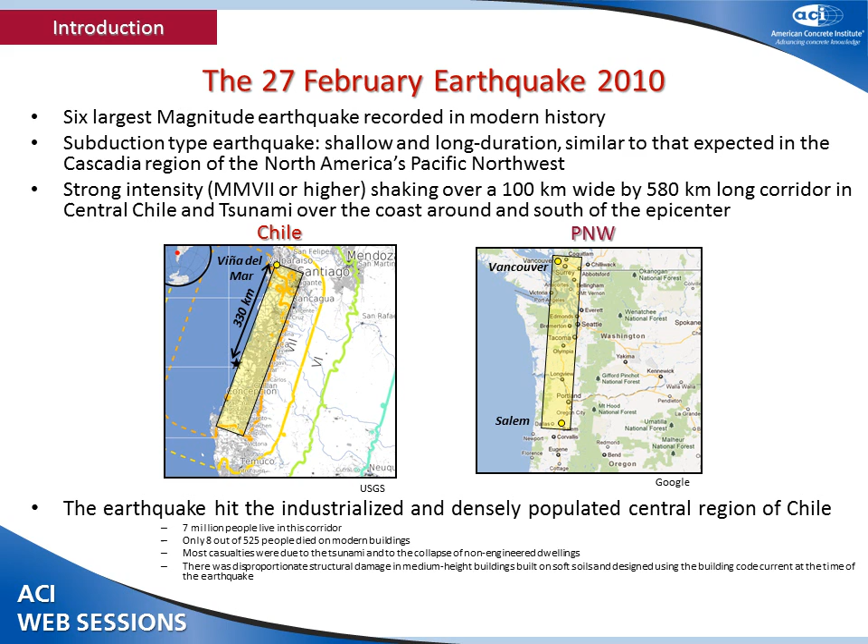Having said so, we must note that there was disproportionate structural damage in buildings that are relatively new in Chile, and that's a little bit of concern because there was extensive buckling of the reinforcing bars and crushing of the concrete in many of the walls. So in the end, we had a very large earthquake. People are okay, but is there something we could do, for a little cost, to enhance the performance of these buildings? That's something that is up for grabs.

So if we go back, this is a view of Viña del Mar. It's a beautiful city by the Pacific Ocean. And you see it's forested in medium-rise buildings. And these buildings in Chile follow more or less a typical archetype. You have a large density of thin walls everywhere. So partitions, the way we do them in the United States, are practically non-existent or limited.

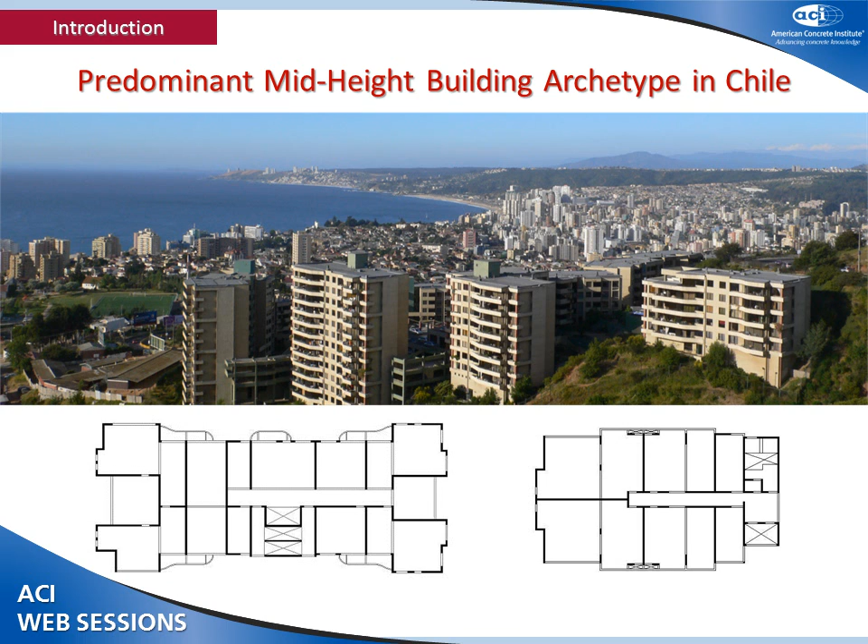In residential buildings, we see reinforced concrete walls or bearing walls everywhere in the building. And these buildings are regular in height all the way from the top to the bottom, except at the critical level where we can see a lot of transitions and openings in the walls to give access to the parking areas.

So typically we'll see slabs that are between 150 to 200 millimeters thick. They are solid slabs. The bearing walls have significant perforations, and they tend to be more critical near the first level where you have the accesses. So it's very difficult there to follow the load paths that you have all the way from the building. How are they going to be transferred all the way to the foundation?

So it makes it difficult to assess, difficult to capacity design these walls and really to postulate a mechanism of inelastic deformation. It could be possible, but it requires that we change a little bit the way we do these buildings. These buildings typically have one or two underground floors for parking. They are generally founded on mat foundations. Sometimes we have deep foundations, but they are very seldom used. So it's not common to use deep foundations in these soft soils in Chile.

And next to these very large walls, we have a series of small gravity columns that can be very easily coupled by the walls and taken in tension and compression, something we fail to see in any of the analytical methods. When we are designing with elastic analysis, we cannot perceive that these columns are going to be coupled and they will be subjected to extensive tension and compression, for which these walls are seldom detailed for.

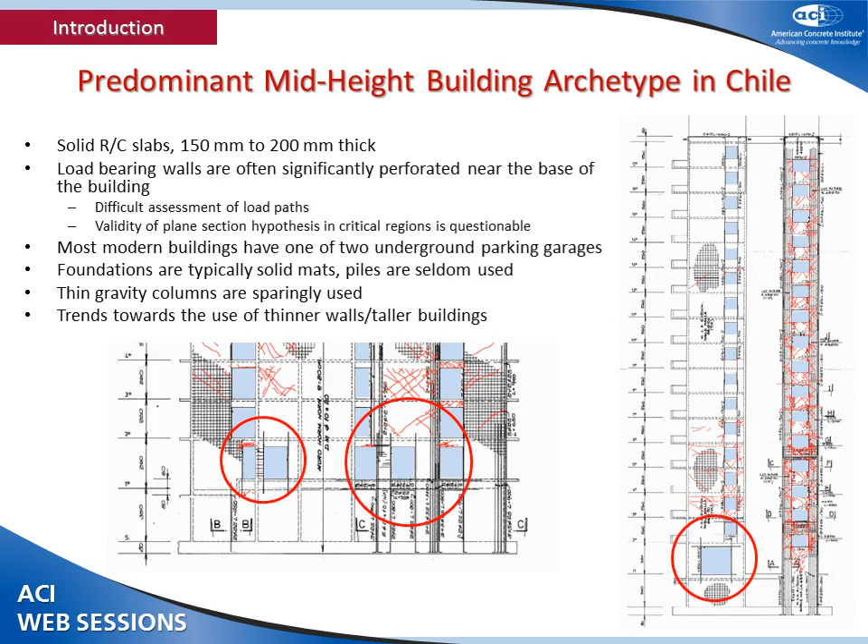So let me give you a little bit of background into what has been done in Chile. The codes in Chile have changed over the years, but basically the detailing remains pretty much the same. For these medium-rise buildings, the base shear ranges between 12, 15 percent or something of that order of the building weight. The walls are not necessarily detailed for ductility. There was the feeling in Chile over the years that the earthquakes they have are high frequency, and the displacement demands are not there to push these buildings beyond the elastic limit.

So somewhat the detailing of the reinforcement in many parts of these walls has been relaxed, and we can see a lot of lack of confinement, which was not required by the code, as is required here by ACI or all the codes in the world. And you see walls that have significant reinforcement at the ends with very little or no confinement at all. The transverse reinforcement for shear used to be anchored at 90 degrees. Obviously, once you have spalling of the concrete cover, you expose this reinforcement, you lose the anchor and the bars buckle. So we saw quite a bit of buckling, which I will show you, and even fracturing of the bars.

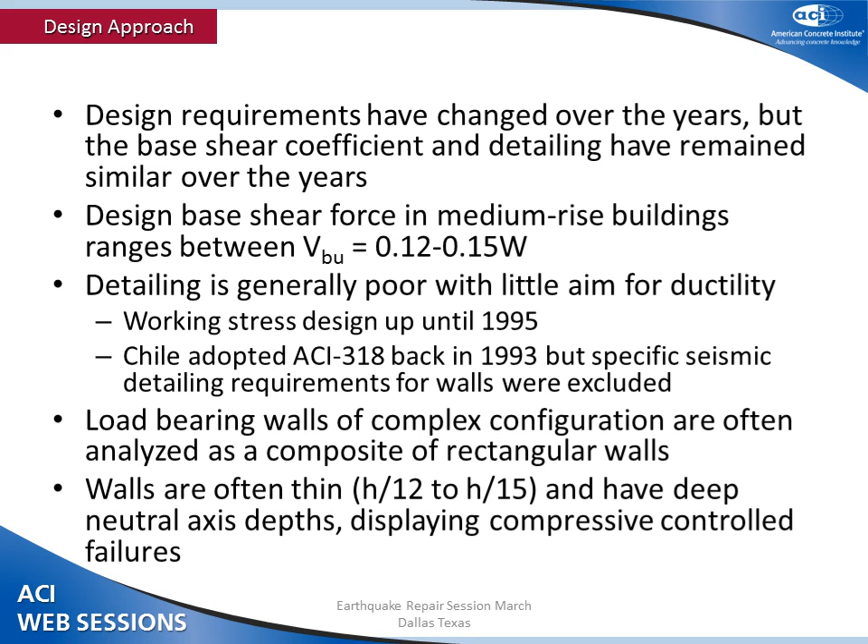In Chile, the ACI code was adopted back in 1993, and it's still current today with some changes. The walls are typically thin, a ratio between 1/12 to 1/15 of the clear height of the floor. Typically they range about 200 millimeters, 8 inches, give or take. So let's now focus on Viña del Mar.

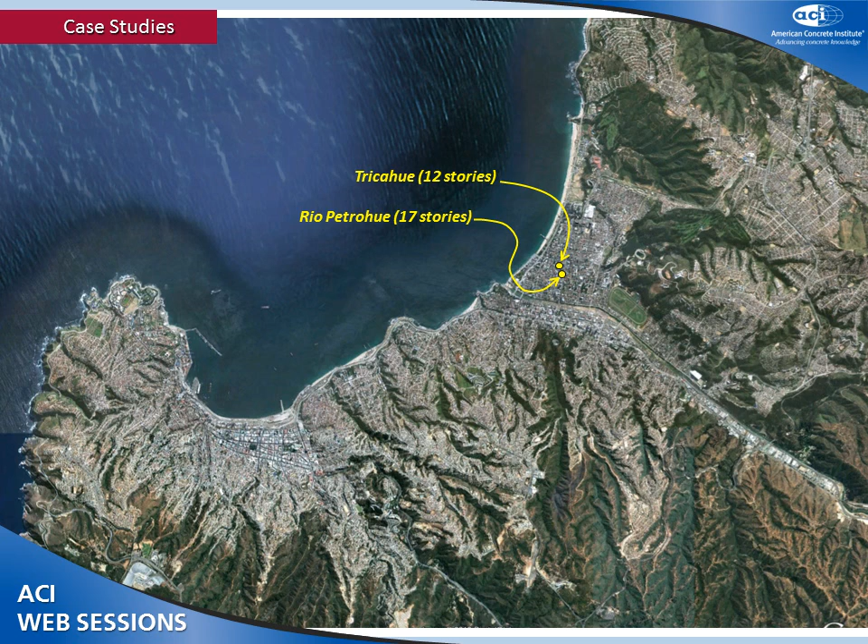So let me give you a close-up of the two buildings. This is the Tricahue building and the Rio Petrohue. And you see a number of buildings. Some of them are damaged and some of them are okay. These two buildings are sitting on soft soils, typically equivalent to what we would call here in the United States ASCE soil type D, low shear wave velocities, soft sands. They are founded on mat foundations. They are not sitting on piles or anything like that.

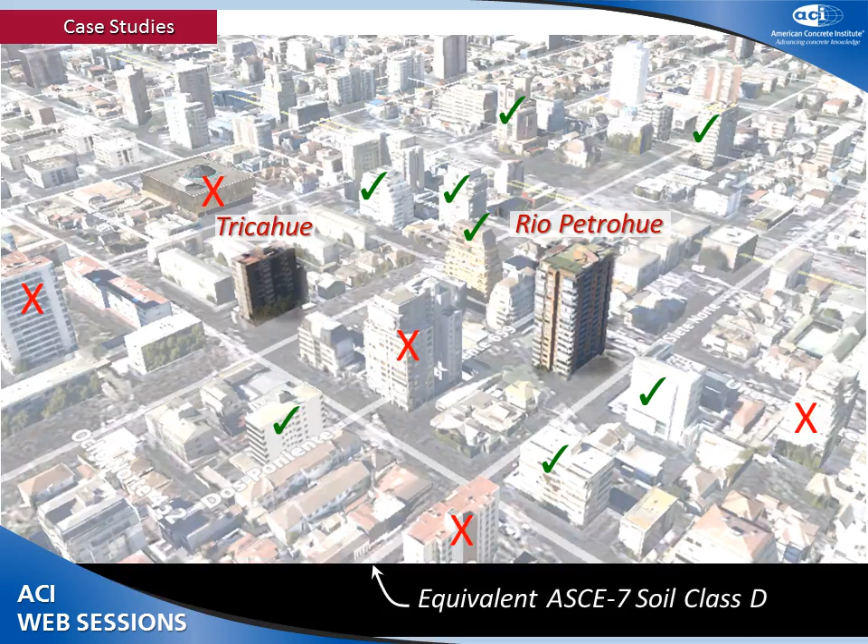The prognosis of the damage observed in these buildings was extensive crushing of the concrete at the lower levels of the building, endemic buckling and even fracture of the reinforcing steel, which was quite common in many buildings, not only in Viña del Mar, but also in Santiago and Concepción, different parts of the country.

So as a repair scheme, the main thing is how do you deal with the problem? Can you close some of these wall openings that are creating a lot of difficulties in the load path? Yes, you can. So you go for it, you close these wall openings. Increase the wall thickness. Some of these walls were really thin. Can you increase the wall thickness? If you're allowed to, you go for it. You increase those wall thicknesses.

Can you add some walls? I mean, in some cases it is possible to add some walls, and that's one of the methods that was used in Rio Petrohue, where walls were added to add additional strength to the building. And obviously then the small pieces here of epoxy injecting the small crack widths that develop in the slabs all throughout the height of the building. In some other applications, there has been the use of carbon fiber strips applied to the walls to enhance the shear strength.

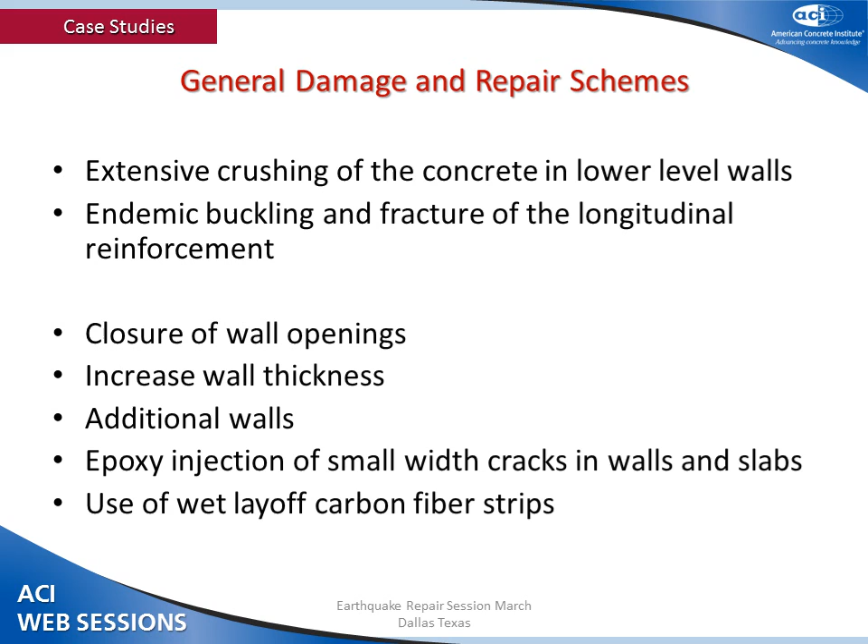So Rio Petrohue is a 17-story building with a total repair cost which does not include the repair cost of each apartment. It is all the structural repair cost of the building, the structural part, as well as the repair of the facade and the interior, the common areas of the building. So each cost associated with the repair of the apartment itself is not included. The repair cost of the building nears about $1 million, which is about 1/3 of the total replacement cost.

So associated with this, you are spending a lot of money repairing things that are not structural but have to be repaired because the structure failed. And the total repair cost to replacement cost is about 1/3. In Chile, it was quite common that if the repair cost is nearing about 40% of the replacement cost, a decision is taken not to repair, and then it's a legal process of bringing all the owners together to try to sell or form a cooperative for the building, demolish the building and build a new one.

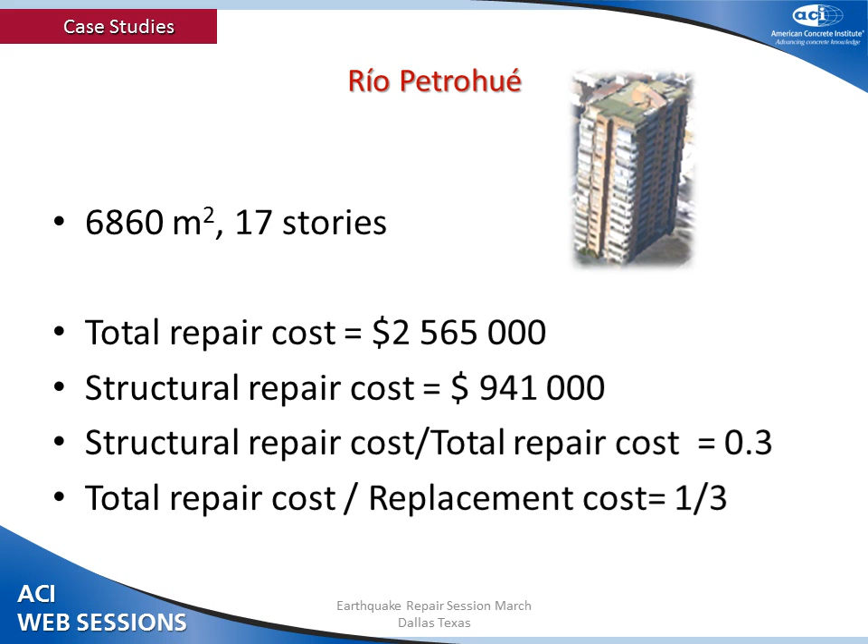So that's a very complicated part of the story, the legal process that goes with a building that is owned by many people, some of whom may or may not have their own personal insurance, but something has to happen to this building. There are about 3 or 4 buildings in Viña del Mar that are being demolished. Some of them are still in the process of deciding what to do. This is 2 years after the earthquake.

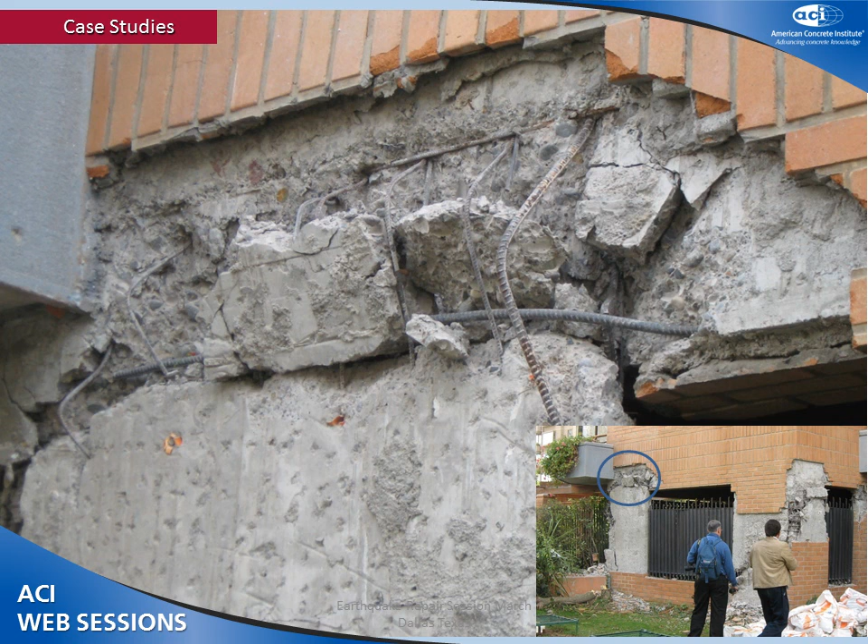This is the kind of damage you see. Exposed here, you see the crushing of the walls in several areas. In this case, the building in this particular location has come down on the order of 1.5 inches. So you see the development of yield lines in these buildings in Chile, quite common. You can see the bars have buckled now that the concrete is crushed, and this is basically suggesting that the building has come down quite a bit. Extensive buckling and also fracture of the reinforcing steel.

Very poor construction, as Des showed you a minute ago. It's also evident in Chile, the lack of inspection; sometimes we do some kind of sophisticated analysis and the level of construction and inspection is not there to follow up. So in the end, it gets built with very poor detailing, lap splices that do not exist. So all kinds of things are exposed when you are peeling off this building and trying to see what happened to it and how you can repair it.

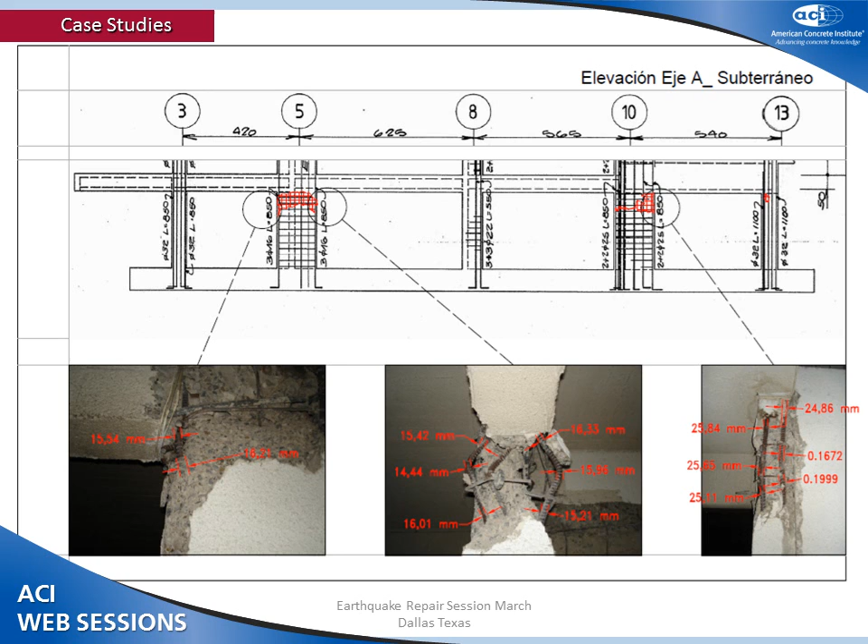The first thing in these buildings obviously is mapping the damage, basically trying to see what has happened to the building, creating a history of the damage that allows you to make decisions, repair strategies, and so on. So in this case, all the damage has been mapped with photographs, dimensions and measures, and then a decision is made as to the best strategy to repair the building. Here we see the mapping of the cracks in the slab. Chile is very fortunate, in my opinion, to have these thin slabs that are highly ductile.

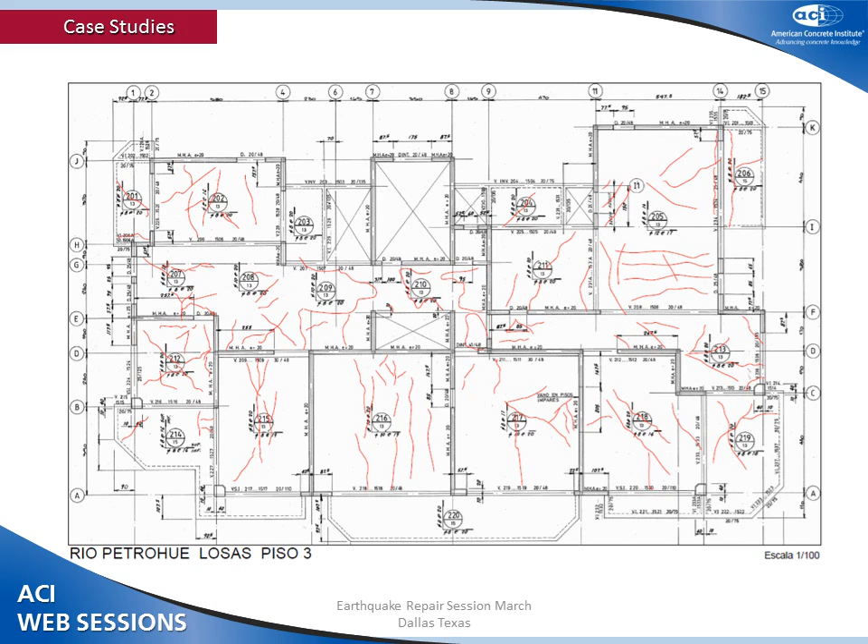One of the issues that comes in repair is now you decided to peel the reinforcement and remove the crushed concrete and expose some of these walls, but you have had creep because in these very thin walls sometimes the axial load ratio is quite high, and you remove the concrete from it, and then your cage buckles because you have had creep over the years. Your reinforcing steel has deformed elastically, and as soon as you remove the concrete, it bends.

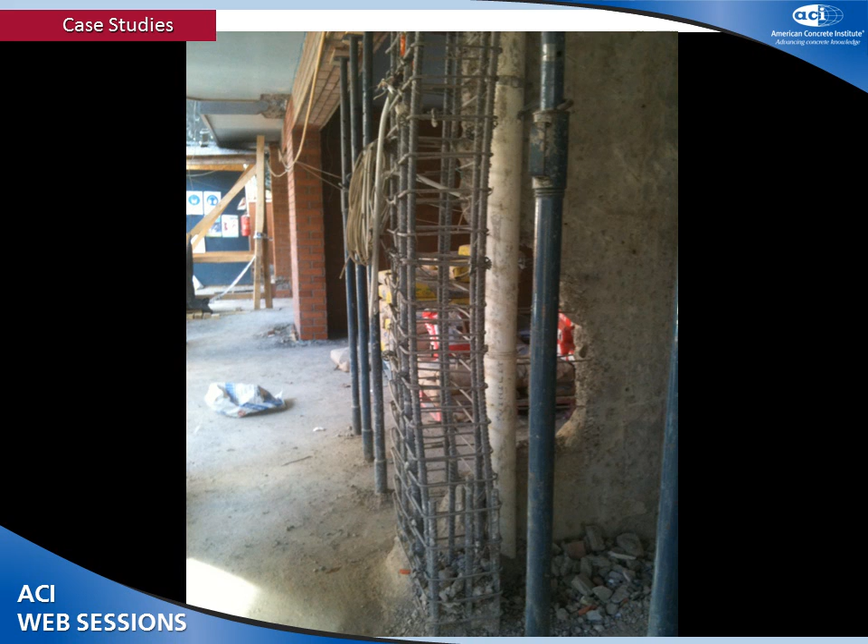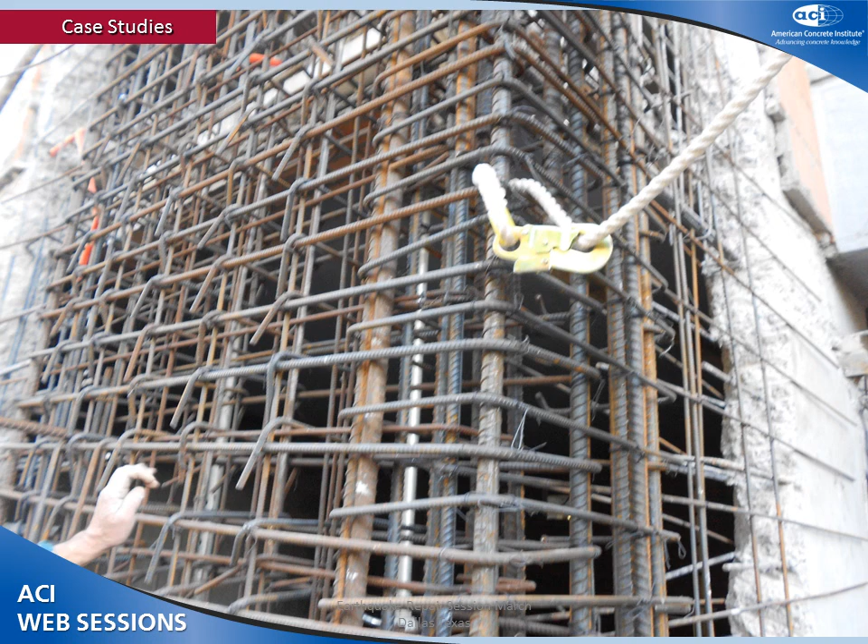And that is not a trivial thing because you think you can pull the reinforcing cage back into position with the mold or something. It's just not that easy. Sometimes it's easier to actually cut the reinforcing steel and overlap to overcome this problem. This is the repairs for this, just peeling the reinforcement, placing new cages. You want some walls here where you see the damage, the repair job, adding thickness to the wall, additional mesh.

And the Tricahue building has a similar repair strategy. It's 12-story, 5,000 square meters, with a repair cost of $1.5 million. The structural repair cost is $600,000. So the ratio between the two of them is about 40%. So you spend 40 cents repairing the structure, and then 60 cents repairing everywhere else, restoring the facade, restoring the windows, restoring all the common areas in the building. It becomes expensive when you have to do these things.

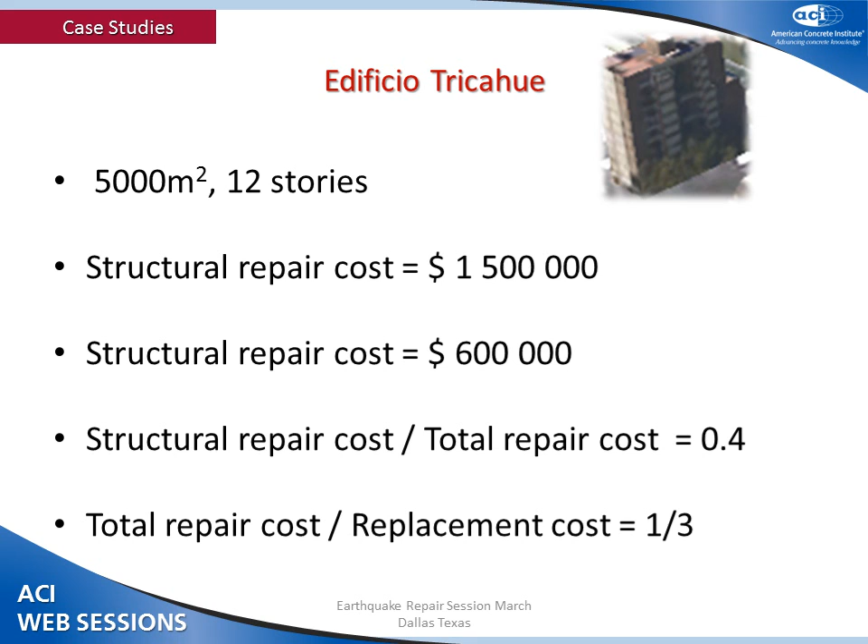And for this building, the same as in our previous building, the total repair cost to the replacement cost is about 1/3. You can see the damage, again, extensive buckling, opening of the 90-degree hooks. Makes you wonder sometimes if you should spend a little bit more time investing in detailing of these buildings and building them well. It's an extra assurance, and it will cost just a fraction of what you're spending in something else, which can be passed to the owner for a very, very modest, if minimum, additional cost.

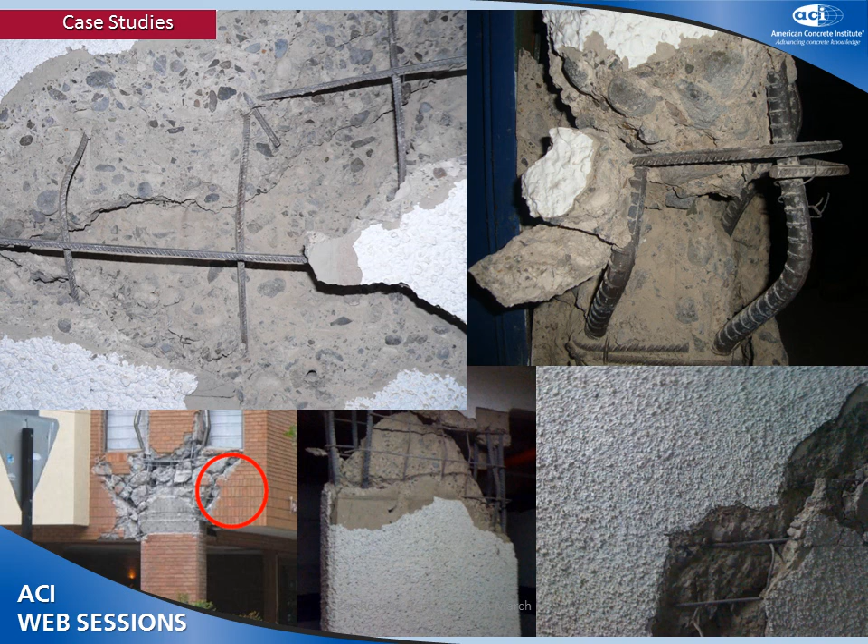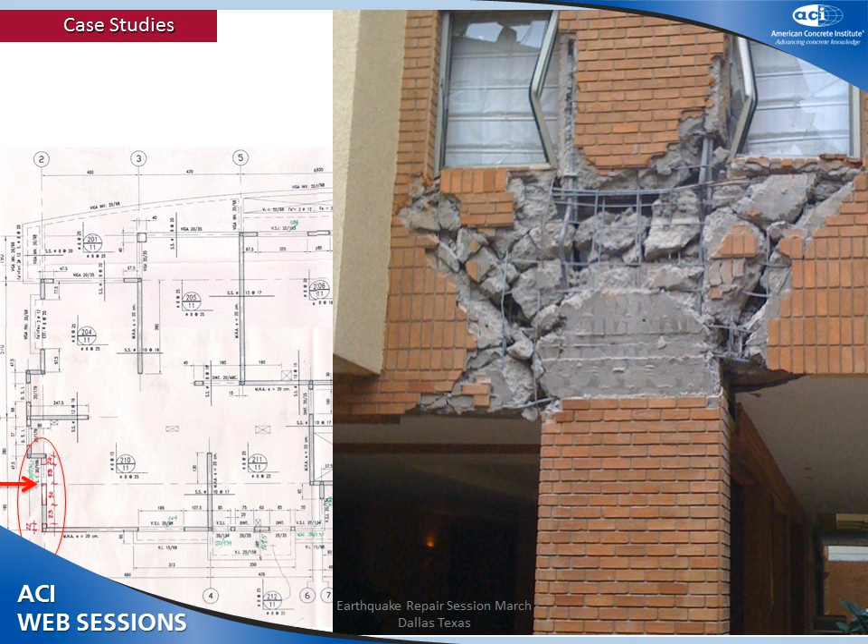You see the damage here with extensive crushing of the concrete, buckling bars, shear failures in the adjacent girders to the wall, and then the repair work, adding elements. Very similar. It's an artisan way to do the business. The access, the spaces in these buildings are rather confined, so it's not easy to spray with shotcrete, and it's done basically by casting the concrete and doweling into the concrete, removing, sometimes demolishing everything.

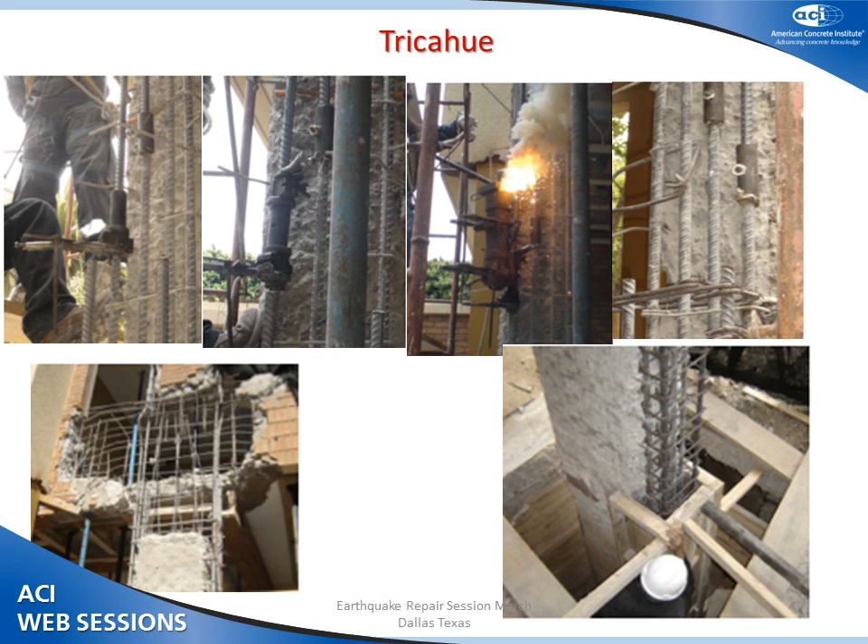This is the addition of walls, increasing the thickness of these walls. You can see one detail here where the existing wall has been doweled into to add additional elements into the wall, properly forming a rectangular wall here with much wider thickness. So that's basically very similar to what has been happening in Viña del Mar, in some parts of Concepción, with the traditional way of repairing these buildings now that they have been damaged with the earthquake.

And in this building also, there is evidence of lack of shear reinforcement common to many buildings in Chile. And I think as we learn a little bit more, we realize that the dynamic effects of buildings are interesting, and they cause larger shear force demands in some of these structures. So in some of these applications, the use of carbon fibers comes in very handy for restoring or providing more shear strength to these structures.

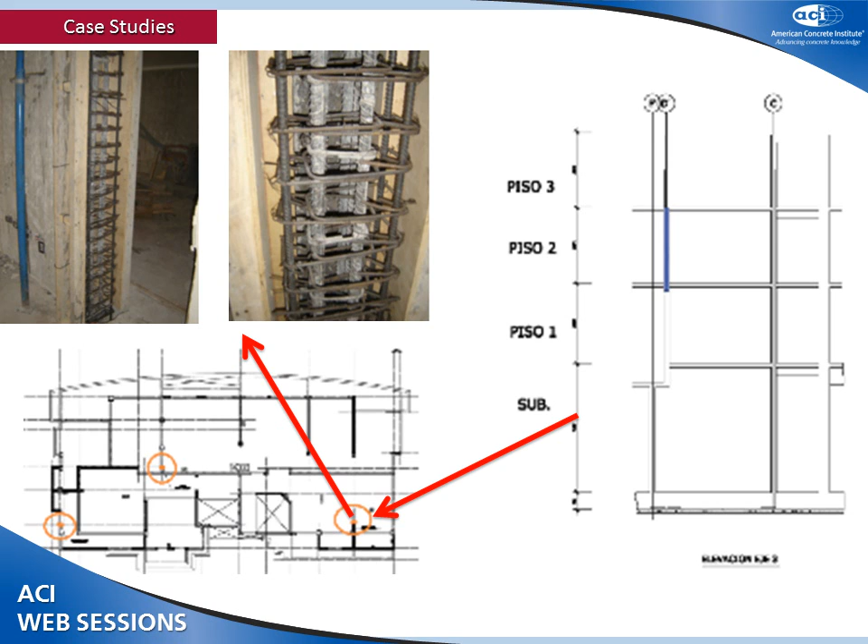So to end my presentation, I would say that in many buildings where you can assess that the cost is about 1/3 of the cost of replacement of the building, you go ahead and repair the building. In some of the cases, you have to organize the owners of the buildings in cooperatives and try to come up with decisions on what to do, if demolish the building, when, how, and what to build next. It's a very lengthy and difficult process.

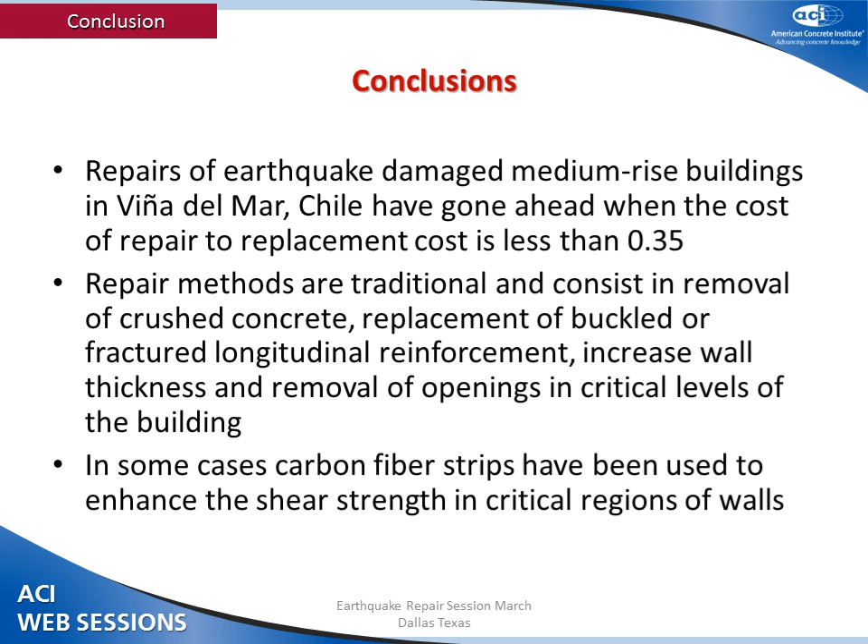And the repair methods have been traditional. There have been many of them, but using the traditional methods of peeling, removing the concrete, casting the concrete again, and with some exceptions where additional carbon fiber strips have been used to restore shear strength.